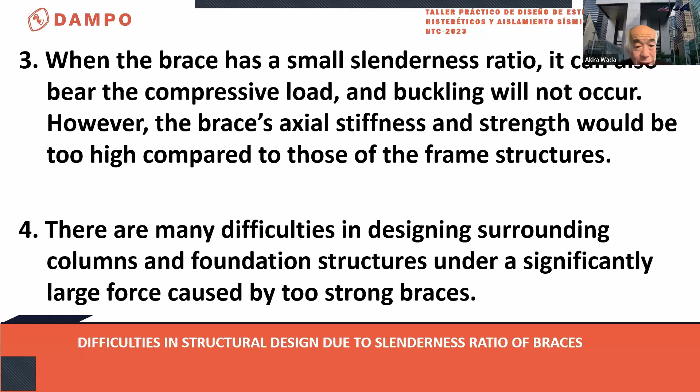If the problem of buckling is solved, it will be possible to design the appropriate stiffness, appropriate yield strength, and yield deformation. That's why many structural engineers around the world were waiting for the BRB.

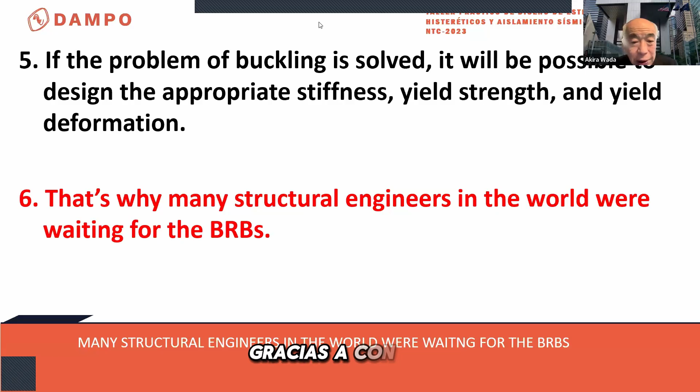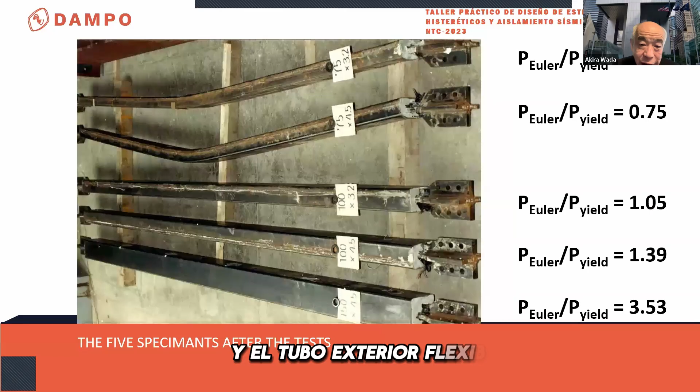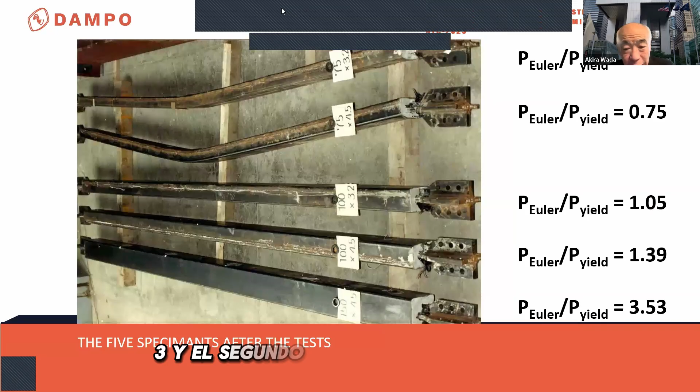There are five specimens. The bottom is the most stiff tube, and the top is the most weak and flexible outer tube. Looking at the Euler buckling load of the outer tube divided by the yield force of the core member: the bottom is 3.53, the second is 1.39, and the third is 1.05.

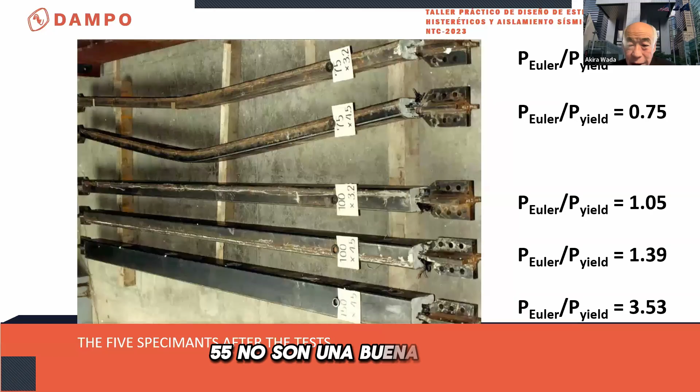These three specimens did not buckle, showing very beautiful tension and compression deformation capacity. But with the Euler buckling load of the tube divided by yield force at 0.75 and 0.55, the performance was not good. In these five specimens, the core member is the same, but the outer tube is different.

Thank you very much, Professor Wada. I will explain later a part of this presentation. I'm Toru Takeuchi. We have organized the textbook for the Buckling-Restrained Braces, issued in 2017 from the Japan Society of Seismic Isolation, called Buckling-Restrained Braces and Applications. Later on, I will talk about the contents included in this textbook.

Basically, as you know, the composition of the Buckling-Restrained Brace is that the core plate is restrained by the buckling restrainer. In many cases, this is a steel tube with mortar infill.

There is debonding material attached between the core plate and the restrainer. That allows slipping in compression within the restrainer without transferring the actual force to it. So that makes pure compression for the core plate after yielding, same as the tension yielding forces. This causes overall buckling to be prevented by the restrainer, but their stiffness is the same as the core plate.

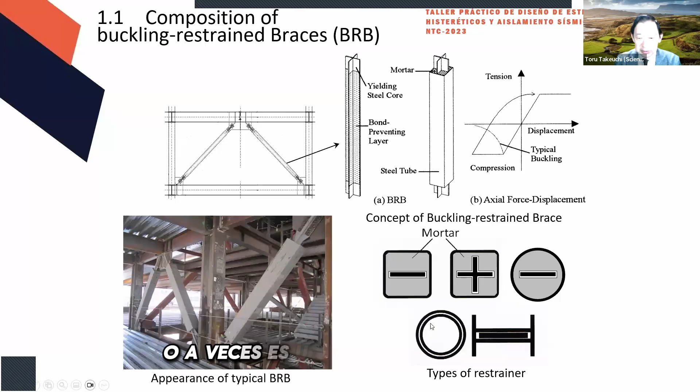So that makes a simplified, symmetrical hysteresis in compression and tension. This is the typical appearance of BRBs. Some compositions use steel tubes with concrete infill or mortar infill, or sometimes double tubes, and dry type BRBs are also produced.

Even though the core plate is compressed within a restrainer, there are some small gaps allowing expansion of the core plate due to Poisson's ratio. So in these debonding gaps, the core plate tries to buckle within the restrainer and touch the wall of the restrainer. Then they move to a higher buckling mode, and afterwards reach the yielding forces. After that, they have a very symmetrical compression-tension hysteresis loop.

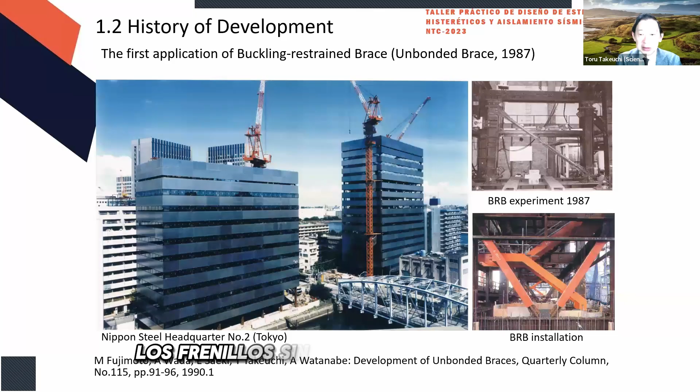The first application of Buckling-Restrained Braces was the unbonded brace developed in 1987, with the first installation in the 1990s at Nippon Steel headquarters number 2 in Tokyo. As Professor Wada said, almost 40 years has passed since the first development.

After that, over 10 years in the 1990s, applications expanded widely in Japan. In 1997, a huge buckling restrained brace reaching 20 meters in length was applied as the Jumbo BRB for the Osaka International Convention Center.

Before that, the concept of damage tolerant design was proposed by Professor Wada, Professor Connor, and others. This divides a structure into a main frame supporting vertical weight with replaceable energy dissipation braces. Conventional seismic design allows the main structure to yield at the beam end and column end, which means after the earthquake the structure itself is damaged.

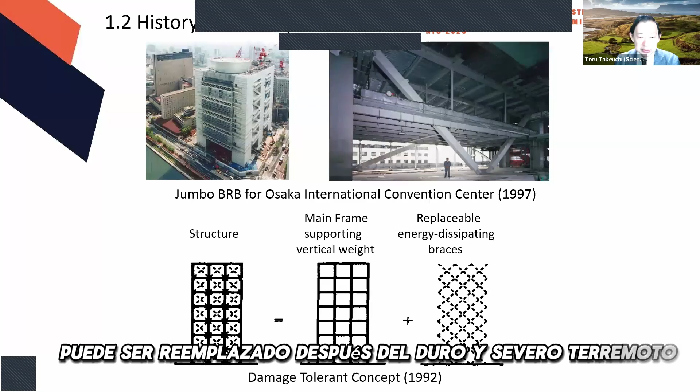But this concept tries to keep the main structure, which supports vertical weight, elastic even under a larger earthquake, and to dissipate all the input energy through additional energy dissipation braces. These braces don't support vertical weight, so they can be replaced after a severe earthquake. This means the building's property can be secured safely, so continuous occupancy can be achieved. This is the damage tolerant concept.

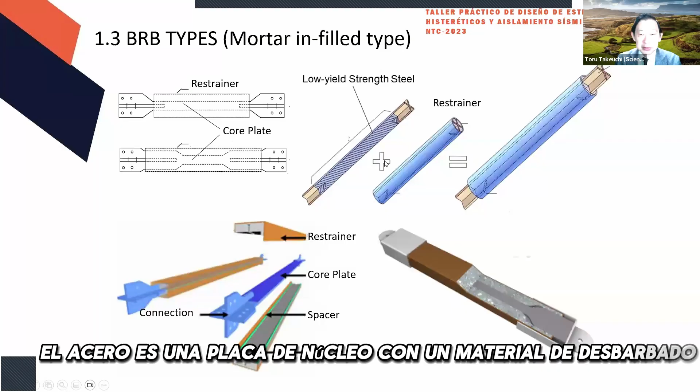The BRB types are, as I said, typically a low yield strength steel core plate with debonding materials together with a restrainer, sometimes rectangular or circular in section, with infill mortar in between. Another type uses double tubes.

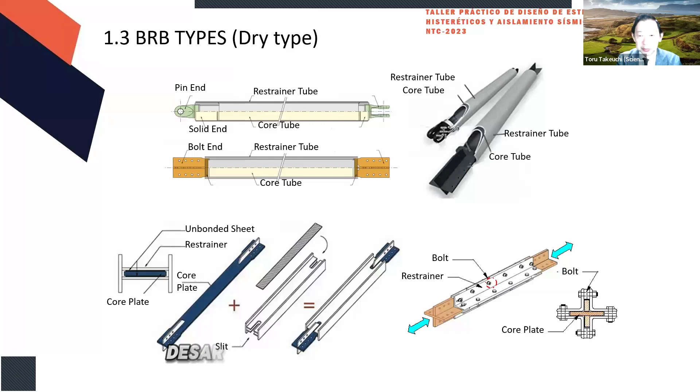In the double tube type, the internal or outer core tube yields while the outer or inner tube prevents buckling - a kind of double tube system. Another type has the core plate covered by channels or cross sections, called the dry type of BRB. That is also developed and used typically in practice.

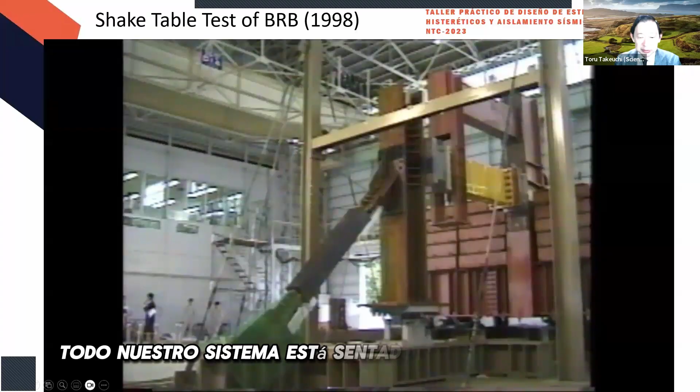Here I'd like to show you an example of a shaking table test of BRBs. The 200 tons of weight sits on a seismic isolated rubber bearing and produces a 2-second shaking model. The whole system sits on a shaking table to apply dynamic forces into the BRB. You can see a big movement, but the displacement is actually continuously distributed along the length of the core plate, and there is no buckling occurring.

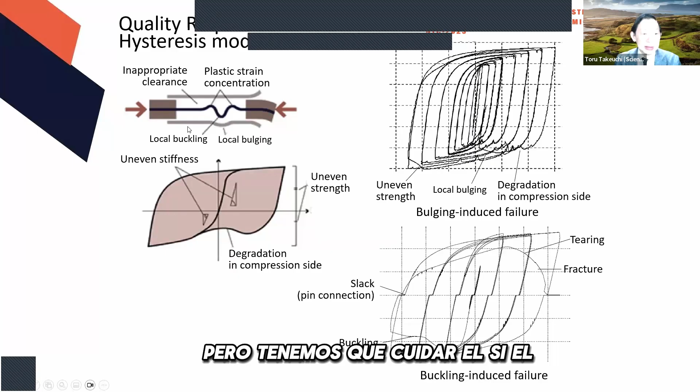The logic is simple for the BRB, but we have to be careful - if the restraining condition is not good, local buckling can occur in a limited part of the core plate. Sometimes local bulging pushes the wall of the restrainer, causing instability, which sometimes leads to degradation of the compression side in the hysteresis.

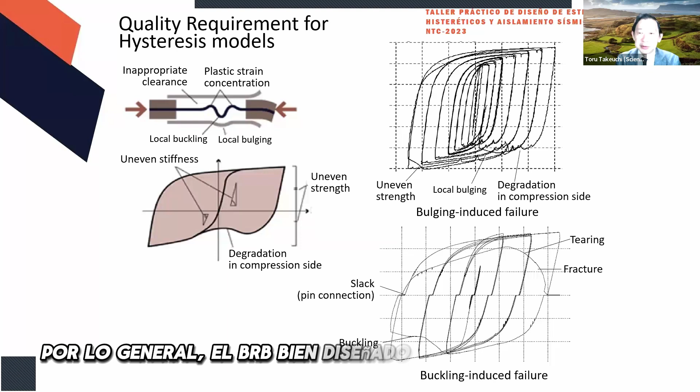Sometimes, because of friction, the ratio of compression to tension strength becomes larger. This is called the beta factor - the yield strength of the compression side divided by the tension side. A well-designed BRB usually has this less than 1.2, but it sometimes reaches 1.5 or more.

So that is not so good for the characteristics of the BRBs. When using the connection, if the pin types in the connections have some slackness, that sometimes occurs also. So for the restrainer design, we need to care about various types of conditions.

These are the different types of failure mode. The most preferable fracture is fracture by low cycle fatigue failure. But before that, sometimes it's caused by global instability including the connections, and also higher mode buckling causes local bulging sometimes. And sometimes the connection fails before the BRB completely dissipates energy.

So the restrainer first needs to successfully suppress core first mode buckling. That is explained in chapter 2 in my textbook. And the debonding mechanism decouples axial demands and allows for Poisson's effect. That is how to design the thickness and materials of the debonding layers.

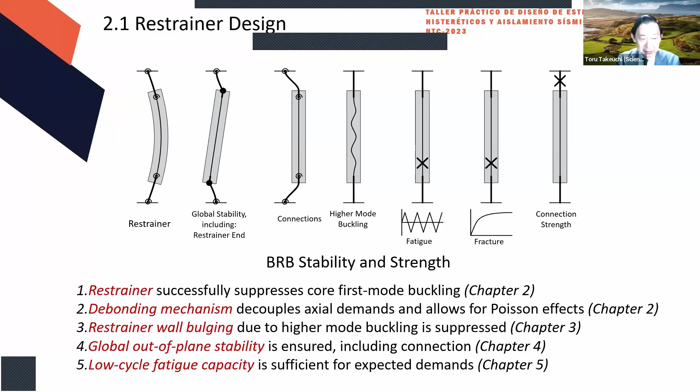So first, the restrainer design needs to be governed basically by this formula. This formula is the maximum actual force including hardening, defined as NCU. Usually that is the core yield force amplified by the overstrength and strain hardening, and it's the minimum yielding strength stress multiplied by 1.4, 1.5, that is multiplied by a plus 2s plus e.

That A is fabrication tolerances, a kind of imperfection. And S is clearances or thickness of the debonding materials, it's doubled. And E is the eccentricity of the axial force.

These eccentricity multiplied by the axial force form the maximum demand for the bending moment for the restrainer. Including the second order effect, the NCRB is the Euler buckling strength of the restrainer given by this famous formula. The EIB is the restrainer's bending stiffness, and LB is the restraining length.

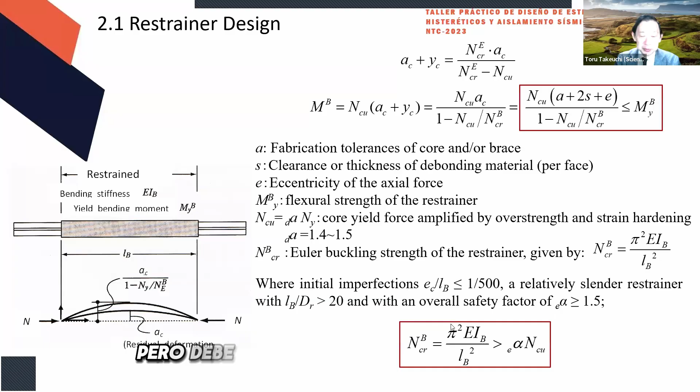That is more easy to understand, the formula for the design of the restrainer. But you need to care about these conditions.

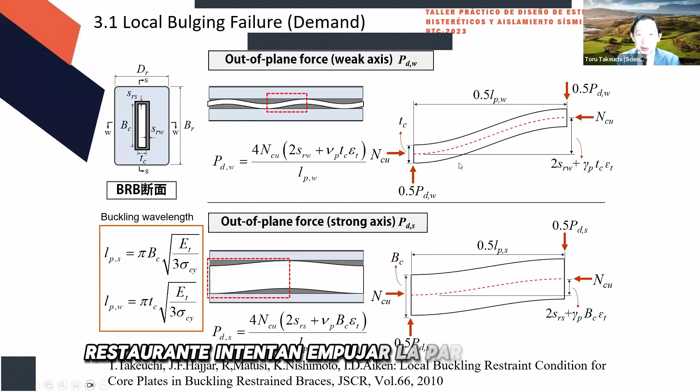The second issue is preventing local bulging failure. When the core plate has local buckling inside the debonding gap, it pushes on the wall of the restrainer, inciting the strength. In the strong axis and weak axis, both formulas can be formed, which should be checked by the capacity of the failure mechanism.

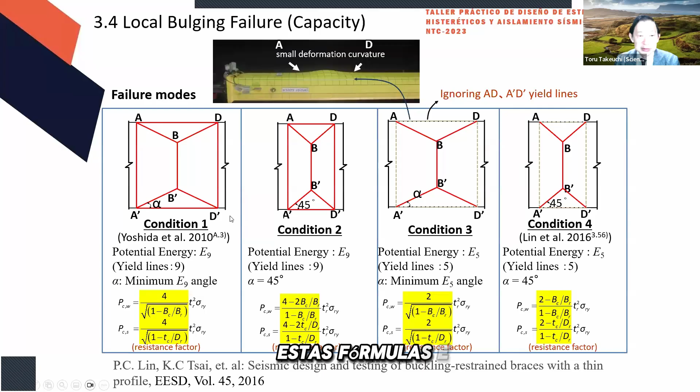That can be calculated with different failure modes using yielding lines, and expressed by these formulas for different conditions of estimation with the yielding line. That explains the bulging effect.

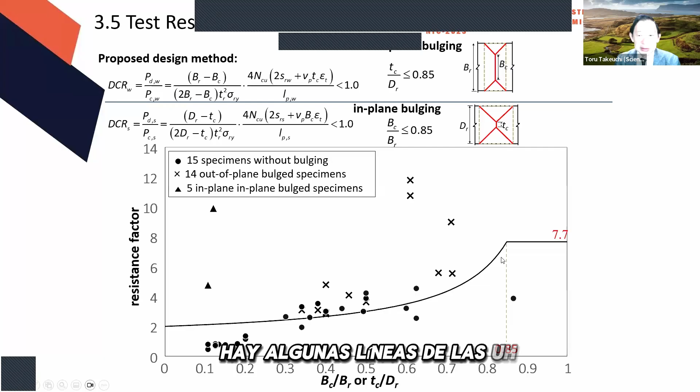To compare it, the proposed design method is capacity divided by demand. Demand divided by capacity being the smaller one is the condition. There are some lines of these equations, and the plotted points are results of past tests.

The cross marks indicate cases that caused local bulging failure, and the circular black dots successfully relate to low cycle fatigue failure without any local bulging. Luckily, they can cover the lines of the criteria. So the textbook shows this formula and the results for preventing local bulging.

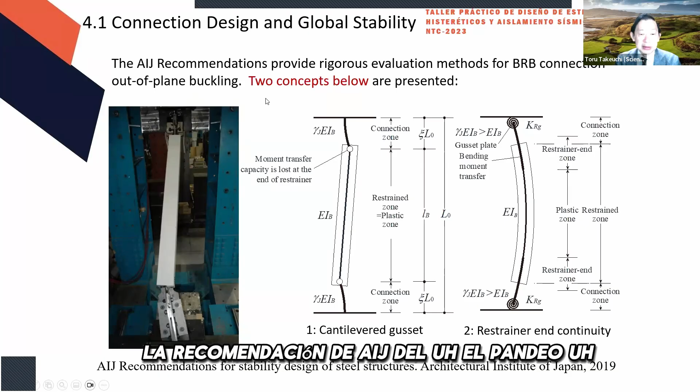Another thing is connection design and global stability. In the AIJ recommendation on buckling of members, it provides the recommendation for stability design of steel structures in 2019, and expresses two types of design for BRB stability.

Without that, a yield hinge is produced at the necks of the BRBs outside the restraining place, which makes overall instability occur before the BRB successfully dissipates energy. So there are two types of models for designing BRB stability.

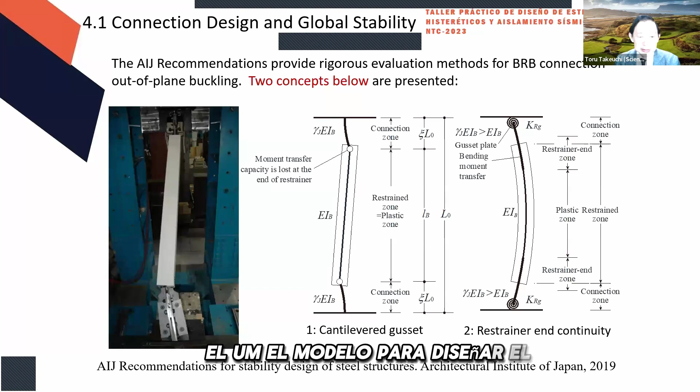One is a cantilevered gusset concept that allows the hinges produced at the end of the transfer, the end of the restrainer, with the connection designed as a cantilever condition. That can be achieved by very high stiffness at both ends. Otherwise, it can rotate here, and that easily leads to instability of the overall system.

The other concept tries to keep the bending moment transfer capacity at the end of the restrainer by gripping the connection at the end, allowing a rather soft connection at both ends. This way some stability condition can be satisfied by the restrainer end continuity concept.

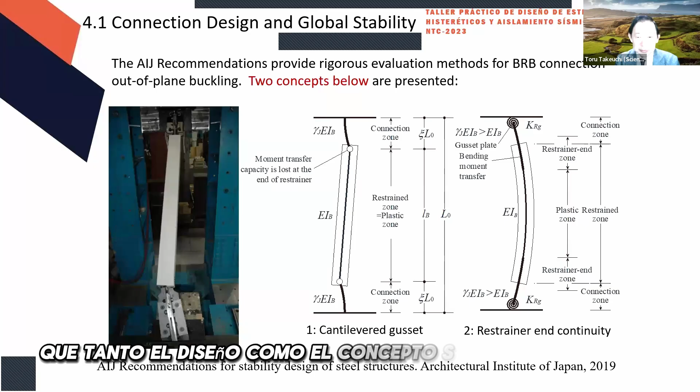Both design concepts can be expressed in the textbook. The very typical BRB configurations are the one-way configuration and the chevron configuration, both affected by the out-of-plane stiffness of the gusset plate and the connection joint.

In Japan, the typical detail adds ribs at the gusset plate, making it quite stiff, a high stiffness detail. But sometimes in the US or New Zealand, a low stiffness concept is used that yields easily out of plane. The rotational stiffness is lower in comparison.

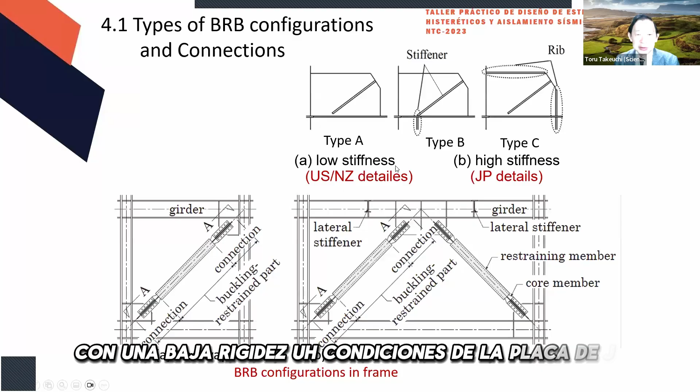With very stiff conditions, we can use this cantilever gusset concept. But with low stiffness conditions of the gusset plate, we need to consider the overall stability check.

The overall stability check can be modeled by this kind of different failure mode, and the formula for the N limit was derived by us from these equations. That is a function of the rotational stiffness and the strength of the restrainer end conditions.

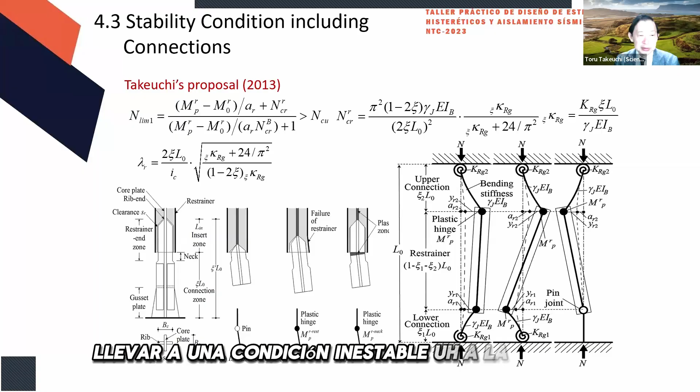When the end of the gusset plate leads to plastic hinges, they produce a four-hinge condition. The stability can then be checked by these formulas.

But if NCU, the maximum axial strength of the core plate, exceeds the N limit, then it reaches the stability limit and leads to the plastic collapse path, meaning it becomes unstable. So these formulas can be used for the connection design.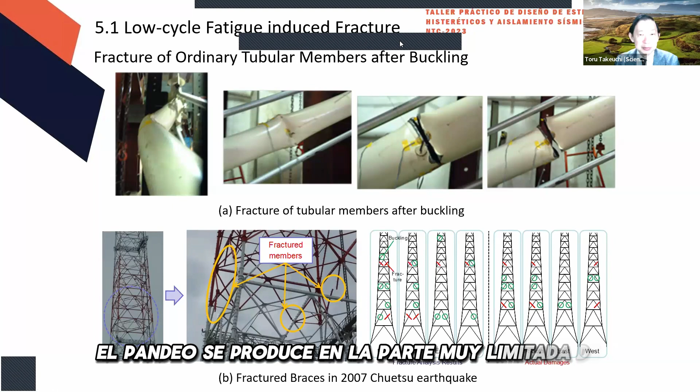After 2 or 3 cycles, this leads to fracture, and after that, a tear occurs on the tension side, which is very fragile. So once buckled, it leads to fracture at a very early stage.

This is a tower, a tower in a nuclear plant that received an earthquake. Afterward, you can see that many of the diagonals fractured after the shaking.

This can also be followed by analysis, where the circle means buckling and the red one means fracture after buckling. So we need to think not only about causing buckling, but about the fracture that follows buckling.

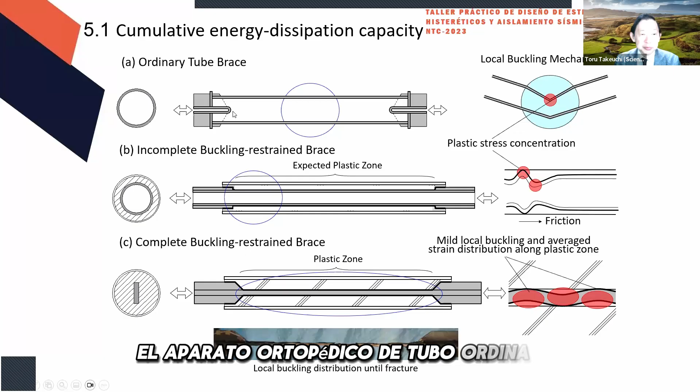There are differences between the ordinary tube brace and the Buckling-Restrained Brace. In an ordinary tube brace, after buckling, local buckling occurs, and all the energy and plastic stress concentrate on this very limited part, causing fracture much earlier.

Incomplete buckling-restrained braces cause some local buckling in a limited part, even because of friction, and then plastic stress concentration occurs on that limited part.

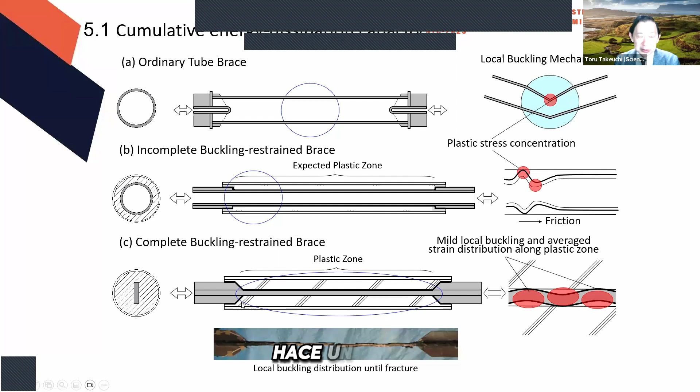So if a well-designed buckling restrained brace controls the distributed plastic stress throughout the length of the core plate, that makes the yielding distributed into the whole length of the restrainer. Mild local buckling and average strain distribution along the plastic zone makes a huge capacity of energy dissipation performance until fracture. So there is a very big difference. The cumulative energy dissipation capacity until fracture follows the fatigue curve of the steel materials.

The vertical axis is the strain amplitude, and the horizontal axis is the number of cycles until fracture. Different types of steels produce small differences in the fatigue curve, and the BRB's fatigue line is a little bit smaller than these materials. That is caused by local buckling inside the restrainer, which reduces fatigue performance. So we need to care about these differences, which are affected by the design of the BRB and the design of the debonding gaps.

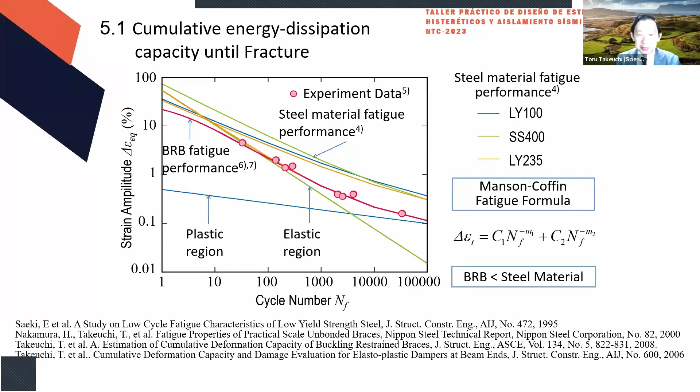Another issue is the performance of long buckling restrained braces. When very long, the debonding material basically reduces friction between the core plate and the restrainer. In tension, the plastic strain is simply distributed along the members, but in compression it goes to a higher mode. Many friction forces are produced along the member, at the touching points of the local buckling condition.

This causes strain concentration at the end of the restrainer, with lesser compressive strain remaining in the center part. In the tension side it's evenly distributed. This causes the cyclic hysteresis to shift to the compression side at the end of the restrainer, while in the center the hysteresis shifts to the tension side. That causes sometimes earlier fracture at the center, or binding into the restrainer at the end. In past experiments, it has sometimes been observed that there is a reduction of the low cycle fatigue capacity for longer BRBs.

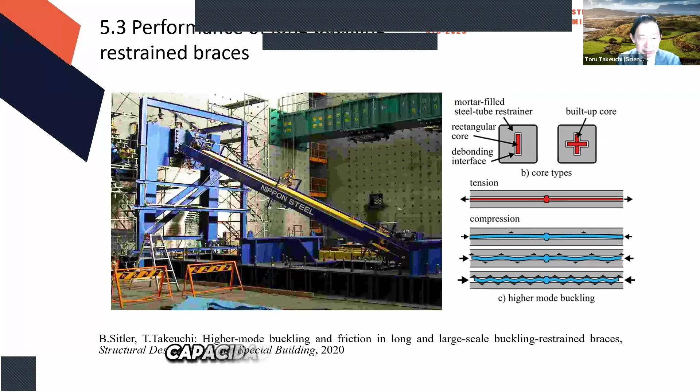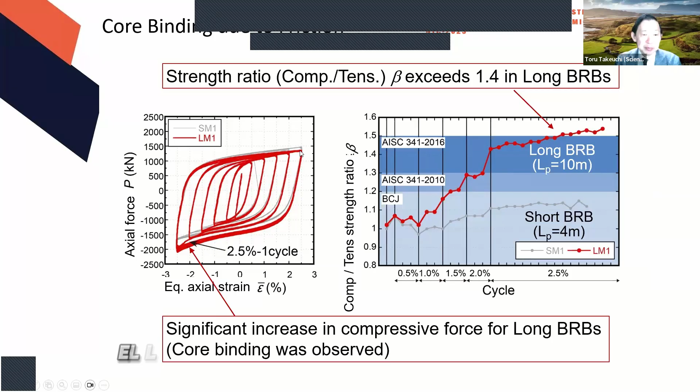So we tested, two years ago at our university, that the long BRB causes earlier failure or a binding effect. For such long BRBs, we found this result — the gray line is a smaller ordinary BRB, and the red one is a long BRB. This graph shows the compression-tension strength ratio beta, which is the compression maximum force divided by the tension side force.

Ordinary BRBs have this ratio less than 1.2. But for longer BRBs, there is a significant increase in the compressive force. Core binding was observed, and the beta ratio reached more than 1.5, which exceeds the requirement of AISC. So we need to be careful with longer BRBs using simple plate sections.

In the later part, I'd like to talk about applications of BRBs. One is the damage tolerant concept, which I already explained, proposed by Wada, Connor, Kawai and others in 1992. That is keeping the gravity-supported structure elastic, and the seismic structure elastoplastic. It can be replaceable — sometimes U.S. researchers call that a kind of fuse.

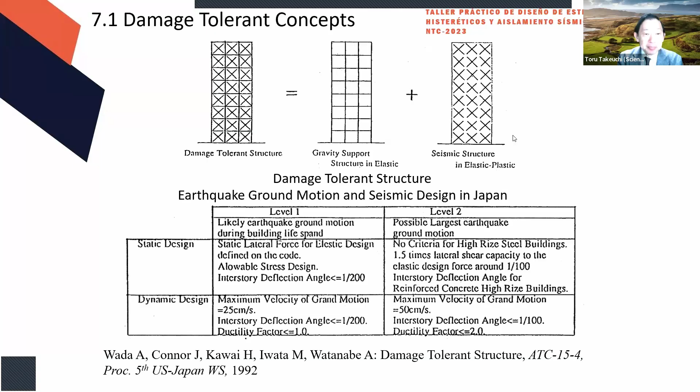This can be achieved by designing a BRB to be stiffer and yield earlier than the main structure. The deformation between yield of the BRB and yield of the main structure provides room for dissipating energy without damaging the main structure. So when we use a low yield BRB and a high strength main frame, this energy dissipation zone can be expanded, making design for the damage tolerant concept much easier.

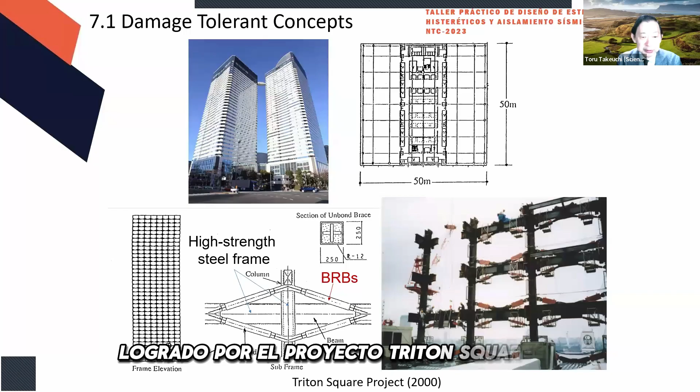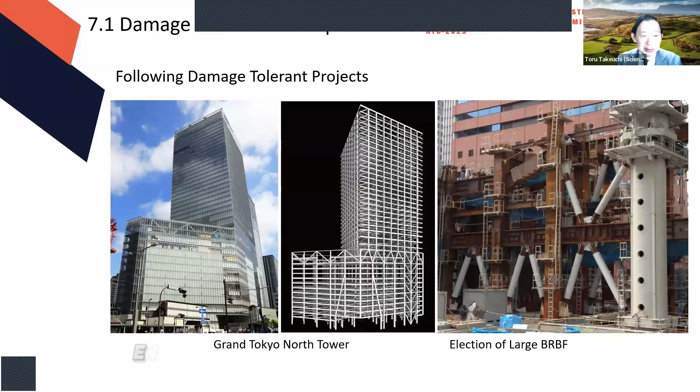The first application achieving this was the Triton Square project in 2000, designed by Professor Wada and Nikken Sekkei. There are three high-rise buildings providing BRBs between the columns and the beams. The BRB uses low yield strength steel, while the main frame uses high strength steel. After that, in Japan, this damage tolerant concept became very common, and many high-rise buildings in Tokyo and other major cities in Japan use BRBs for this energy dissipation concept. Larger BRBFs reaching several thousand kilonewtons are used in this type of construction.

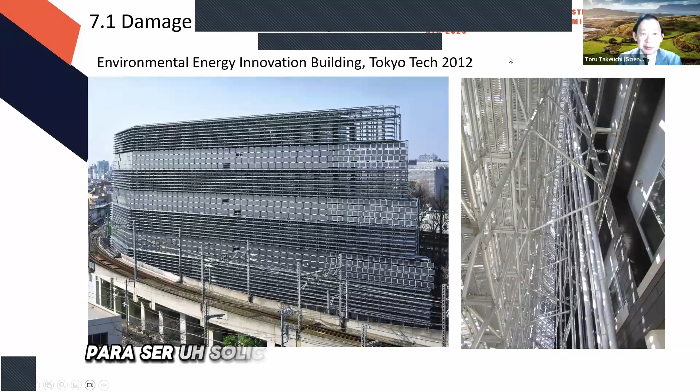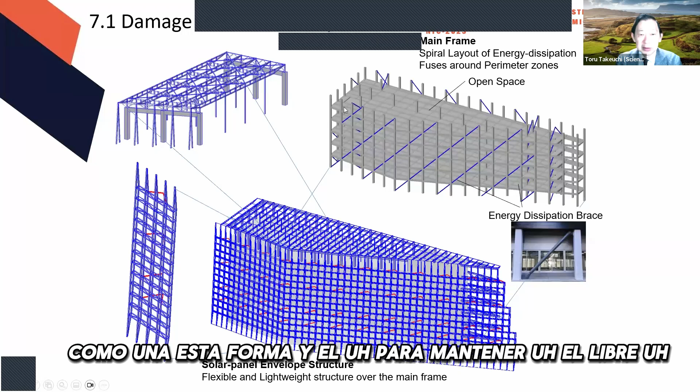Not only high-rise buildings, but low-rise and mid-rise buildings can also apply BRBs for the damage tolerant concept. This picture shows a 7-story building on the Tokyo Tech campus, covered by 4,500 solar cells producing their own energy on sunny days. This building is covered by solar cells, but the main structure has this shape, keeping the space inside the laboratory free of braces. The BRB is provided at the perimeter zone for dissipating energy, and the solar panel envelope covers the main structure, whose seismic capacity relies on the main frame.

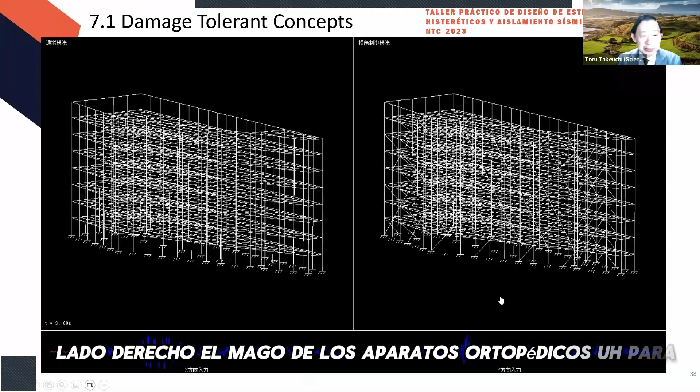This is an animation showing, on the left side, the building without braces, and on the right side, with the braces, facing the Tohoku earthquake.

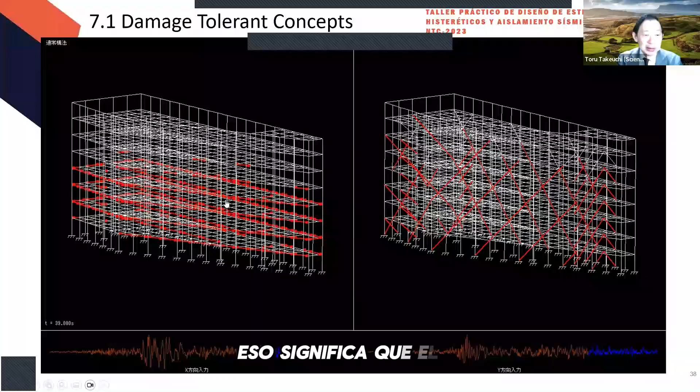The red one shows the beam end yielded, while the right side shows only the BRB braces yielded, dissipating energy while keeping the main framing elastic. On the left side, shaking continues longer and damage occurs at the beam end, meaning continuous occupancy is difficult because the main frame supporting vertical weight is damaged. On the right side, only the braces are damaged or yielded, so continuous occupancy can be achieved after a big earthquake. So these are the two models: ordinary frame and damage-controlled structure with additional energy dissipation braces.

The strength of the BRB is only 1/8 of the main structure, but its stiffness is higher than the main frame, so all the energy is concentrated on the BRBs. Ordinary frames reach about 0.7 percent radian for the story drift angle, sometimes causing damage on the interior frames.

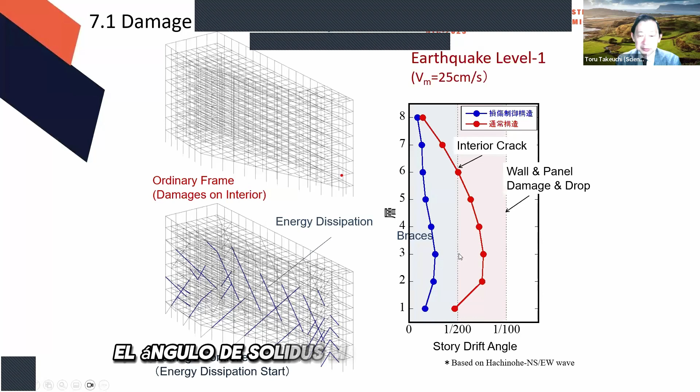With the BRBs, the maximum story drift angle is reduced to less than 1/3, to less than 0.2 or 0.3 percent radian story drift angle. For a larger earthquake with a 500 year return period, the ordinary frame reaches damage at the beam ends, meaning the building would need huge repairs or demolition after the earthquake. With the BRB layout, the maximum story drift angle is still only 0.5 percent radian.

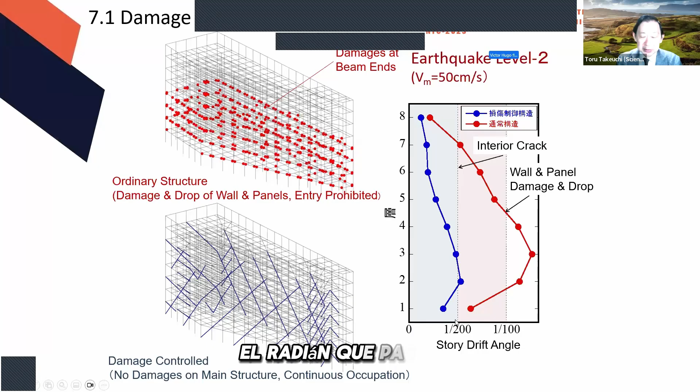That means continuous occupancy is achieved because the interior wall is secured and safe. This concept is also used for high-rise buildings in San Francisco.

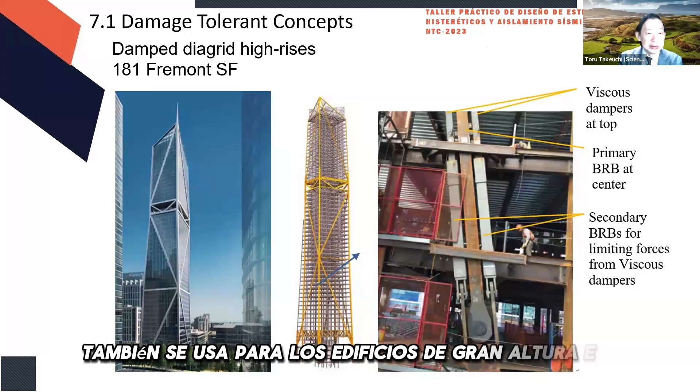The 181 Fremont Tower provides huge mega braces composed of two dampers, viscous damping devices, with a primary BRB at the center. For ordinary earthquakes, the viscous damper dissipates the energy, and for larger earthquakes, the BRB secures ductility for the whole system. This concept is used for retrofit of buildings, and we propose integrated facade engineering.

This involves an additional layer of facade attached to existing frames with poor seismic performance. Inside, this scheme adds seismic energy dissipation braces—BRBs attached to the facade—and together with the outer skin, it controls thermal conditions.

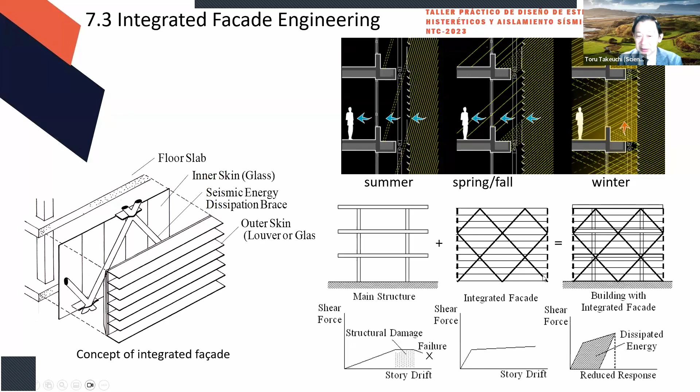For thermal conditions, in summer they cut the summer sun and introduce natural wind in spring and fall, and in winter they produce heat retention at the eaves, conditioning and introducing sunlight inside the rooms. For structural conditions, damage-tolerant design is achieved by keeping the main structure elastic and dissipating energy through the additional facade, within the elastic zone of the main frame.

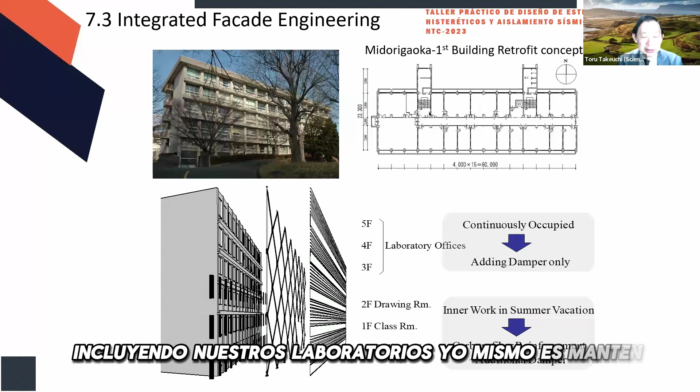The outer skin with BRBs is attached to the facade in the south part. The upper part of the laboratory offices, including my own laboratory, continued to be used inside the building while the retrofit construction continued.

The BRB, up to 1,400 kilonewtons, is attached to the existing building, adding additional strength and stiffness through the additional BRBs.

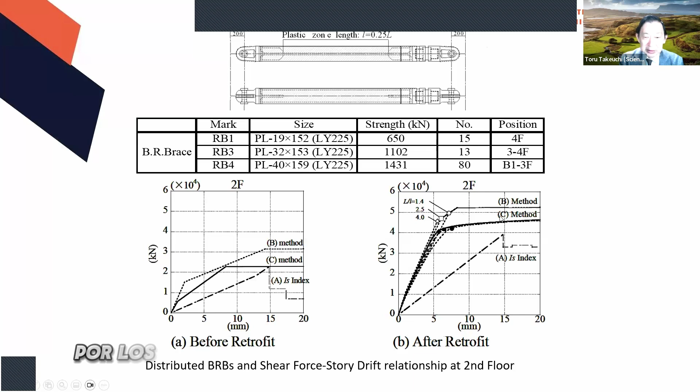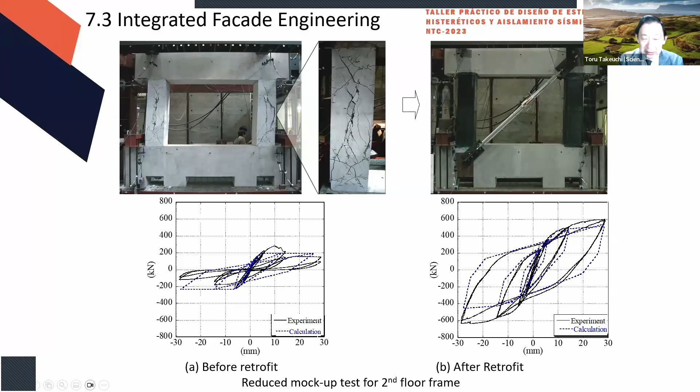Mock-up testing was carried out with the same rebar arrangement. Because of the poor rebar arrangement, shear failure of the column occurred, losing bearing capacity. While covering with carbon fiber and additional BRB, a quite stable hysteresis can be achieved, and the strength is very much increased.

Regarding summer conditions, European countries sometimes use a double skin concept, but that becomes very hot without ventilation in tropical zones like Japan and Mexico. We produced an outer skin concept that is very effective in reducing summer heat in the perimeter zone, and in winter it retains some heat, with additional heating at the lower glass part. So we applied this concept.

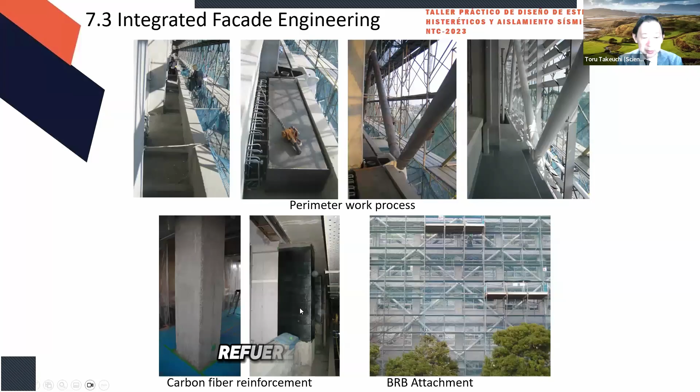Construction was done by attaching a transfer beam to connect the additional beam to the existing structure, covering it with carbon fiber reinforcement, and attaching bracing elements on the surface of the building. The appearance of the building was improved very much, which led to many design awards after the completion of the building.

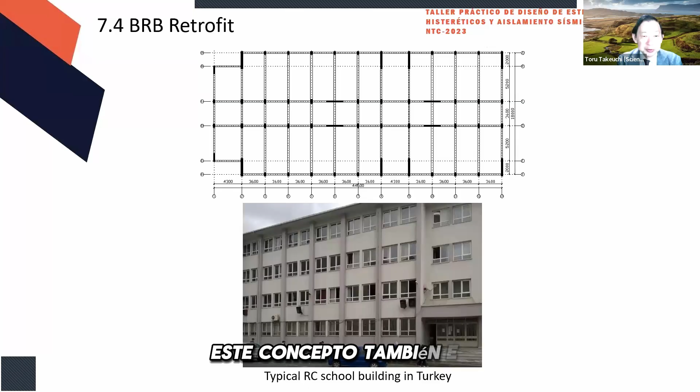This concept has also attracted interest in foreign countries.

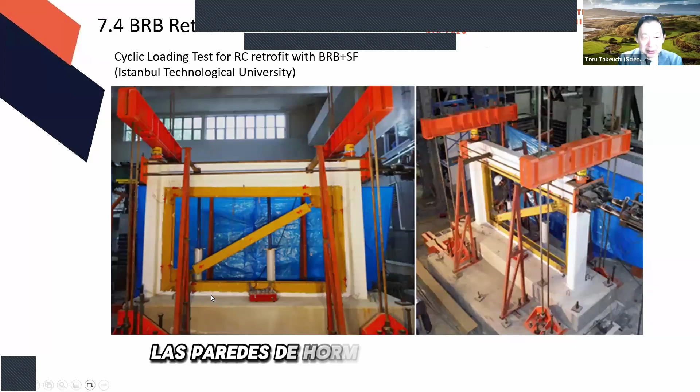The Turkish school is considering BRB retrofit. Joint research was done with Istanbul Technical University, and we propose BRBs within the existing surrounding steel frame, with elastic frames put into the frames of the concrete walls.

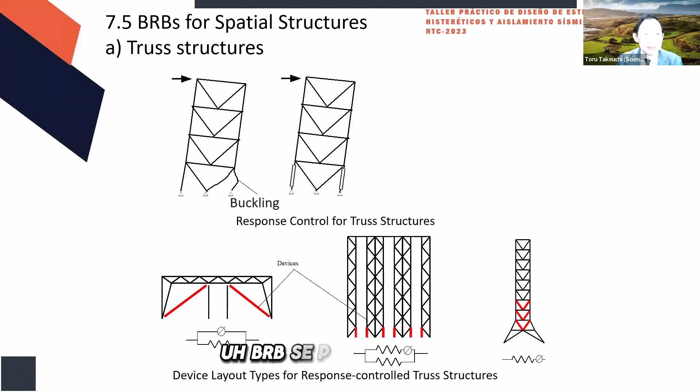That makes the BRBs also improve the performance of the frames, and the steel frame can be effective to reduce the residual drift after the earthquake. For truss structures, the BRB can also be applied to spatial structures. When you push this kind of truss tower, it causes buckling at the bottom. When that member is reinforced, another member can reach buckling, so there's no end to preventing buckling for these truss structures.

But if you replace the lower part, or only two parts, with BRBs, they yield at a certain strength. If these forces can be sustained by all the other members without buckling, the whole member system can be very stable. So the BRB has force-limiting functions, preventing not only this member but all other members from buckling. This can be applied to many gymnasiums, storehouses, or towers.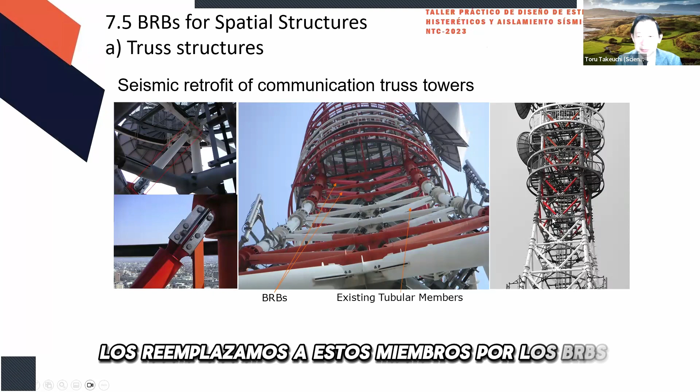So, seismic retrofit of communication truss towers. In a coming earthquake, some of the diagonals are expected to buckle, so we replaced these members with BRBs. That is a very economic seismic retrofit, and also effective in preventing other ordinary truss members from buckling.

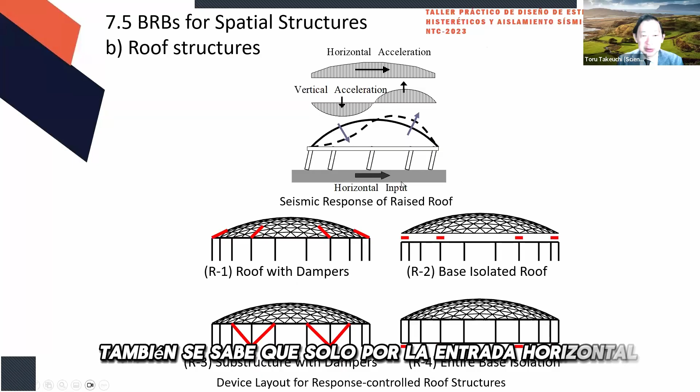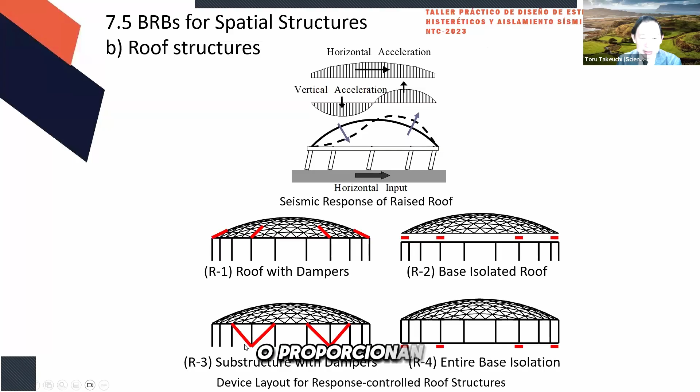For roof structures, it's known that because of horizontal input, vertical acceleration is excited, and horizontal acceleration is excited in both directions, causing a complicated response. This can be improved by additional base isolation of the roof, devices attached on the supporting part of the roof, or providing damping devices to the substructures. In this concept, BRBs can be used to improve the seismic performance of roof structures.

This concept is applied to actual buildings, like Toyota Stadium, using paired BRB braces, and the Shimokita Dome, a membrane dome structure, providing a BRB on the roof surface together with the supporting frames.

And the BRB spine concept: when we distribute BRBs in each story, if the damper fractures at a certain story, story collapse or damage concentration can occur.

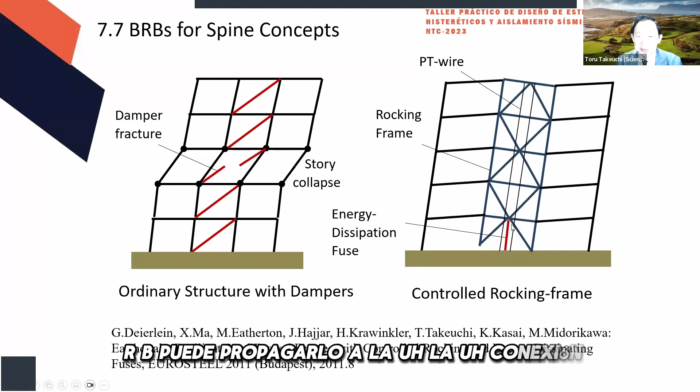In 2011, we worked with American researchers on the concept of a rocking system, providing a spine with rocking actions, where self-centering function is secured by PT wire pushing into it, and energy dissipation devices like BRBs can be provided at the connection between the rocking frame. This concept is also expanded to another spine system.

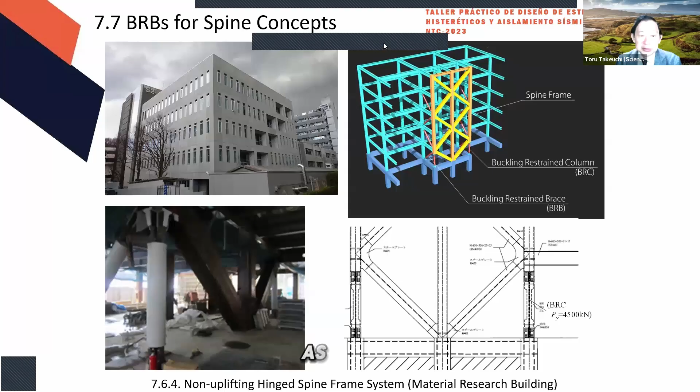This is the material research building in Tokyo Tech at the Suzukakedai campus. I put a rocking spine frame at the center of the building, supported by buckling-restrained columns and braces, which dissipate energy and distribute the damage across all floors. So the BRB can be attached at the rocking position of the spine frames.

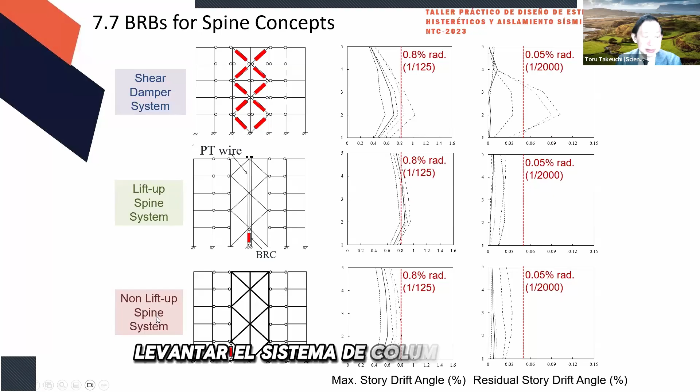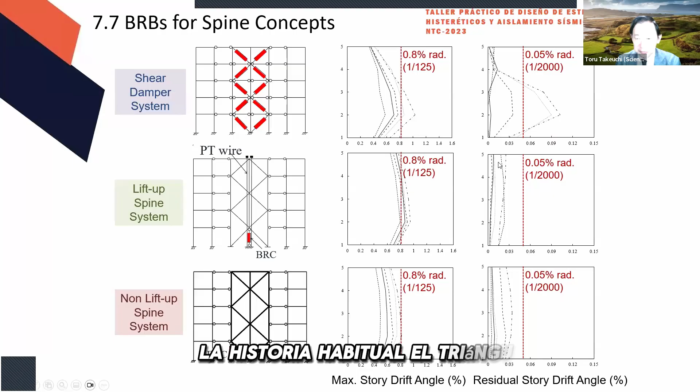Comparing the shear damper system, the lift-up spine system, and the non-lift-up spine system for maximum story drift angle and residual story drift angle: the shear damper system causes concentration at the second floor, but both spine systems have a very evenly distributed story drift angle and much smaller residual story drift angle. That makes for very high performance for continuous occupation after a larger earthquake.

This concept is also used for the retrofit of steel frames, inserting RC core clamps supported by BRBs, in San Francisco, by people including Tipping Mar and others.

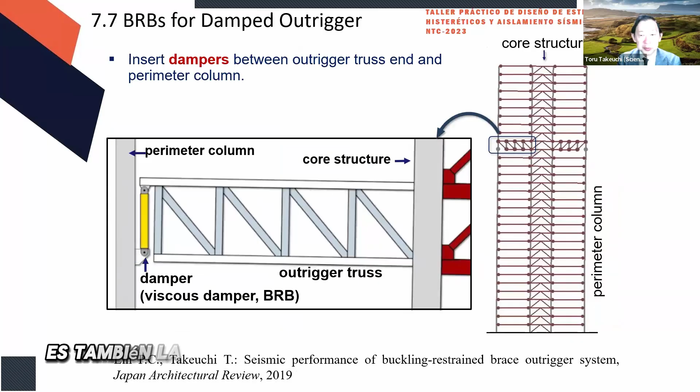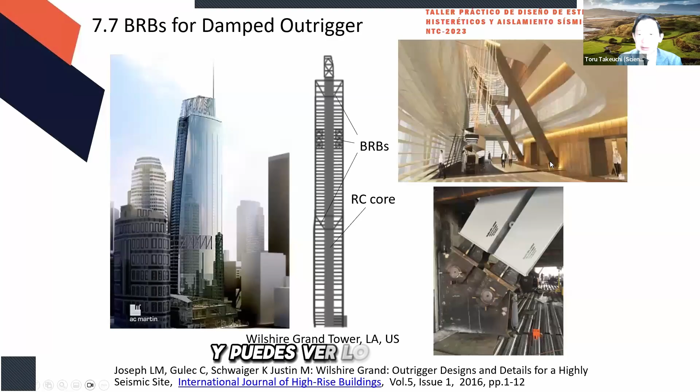BRB is also applied for the damped outrigger system. A damped outrigger system is known to reduce not only acceleration but also displacement, and BRB can be applied for this system. This BRB damped outrigger is applied in examples like the Wilshire Grand Tower in Los Angeles, where you can see large BRBs in the hotel lobby and office zone.

In damage-tolerant structures, I explained that the BRB can be replaced after an earthquake, but actually replacing a BRB is not easy. This building was completed in 1998, stands in Fukushima prefecture, and received the 2011 Tohoku earthquake at very high intensity of acceleration.

There was a cumulative deformation meter and a maximum deformation meter attached on the BRBs, and we measured that some yielding of the BRBs was observed, with a ductility ratio of 4, and the cumulative plastic strain reached 20%. But that is only 6% of the fatigue capacity of the BRBs, and there were no residual deformations.

So the client was satisfied with continuing to use these BRBs after the earthquake, and no replacement occurred. So good BRBs can actually withstand several larger earthquakes over time. I believe that in many cases, a BRB can last for the entire life cycle of the building itself, keeping its energy dissipation capacity even though it yields during an earthquake, while keeping the main structure elastic.

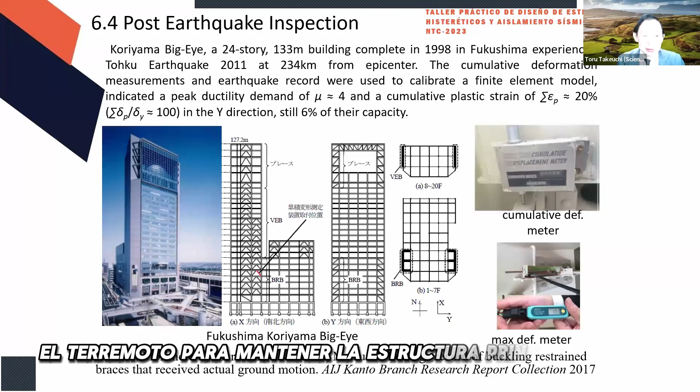So we have also designed another campus building at Tokyo Tech, now Science Tokyo. That is our architectural building where the cafeteria is covered by BRB as an interior element, and we have a nice studio at the top of these buildings.

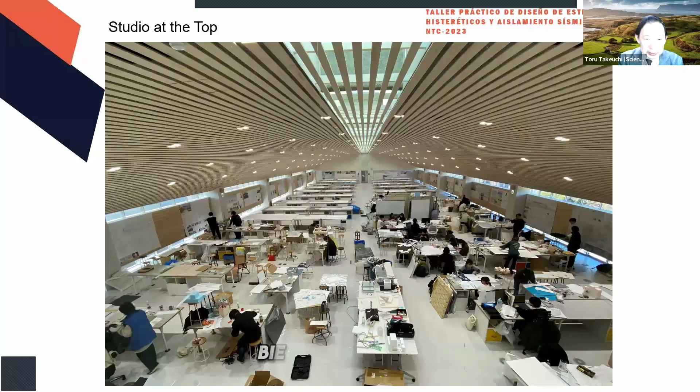So that is my talk. BRBs are easy to use and can be applied to a variety of structural systems once the component design has been carefully considered. Thank you very much for your kind attention. That is my talk. Thank you very much.

Thank you very much, Professor Takeuchi. Thank you, professors, this is a really good and astonishing contribution. We really appreciate your talk. There are a few questions, and I don't know if we have time for one or two. Do you have some time, professors? Professor Wada, Professor Takeuchi?

I will start with the very first one. Carlos Badajoz says he would like to ask your opinion about the following: is it necessary for the structural connections to be moment resisting in order to use BRBs as energy dissipating elements?